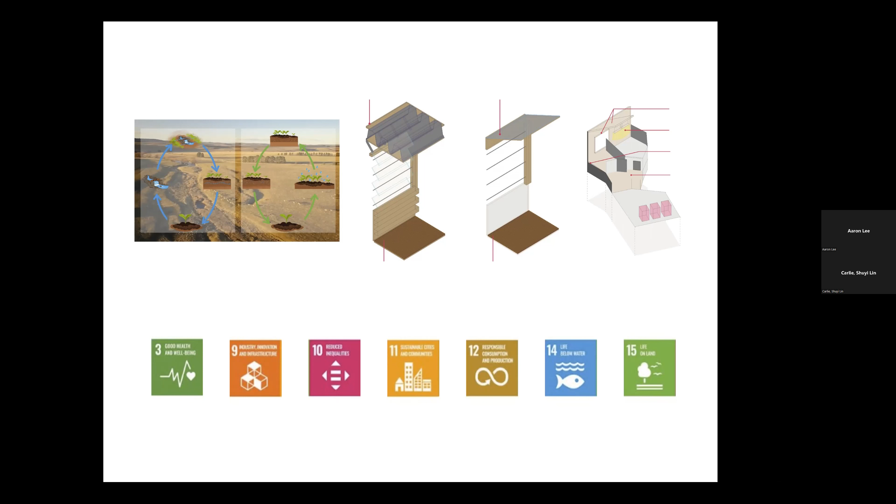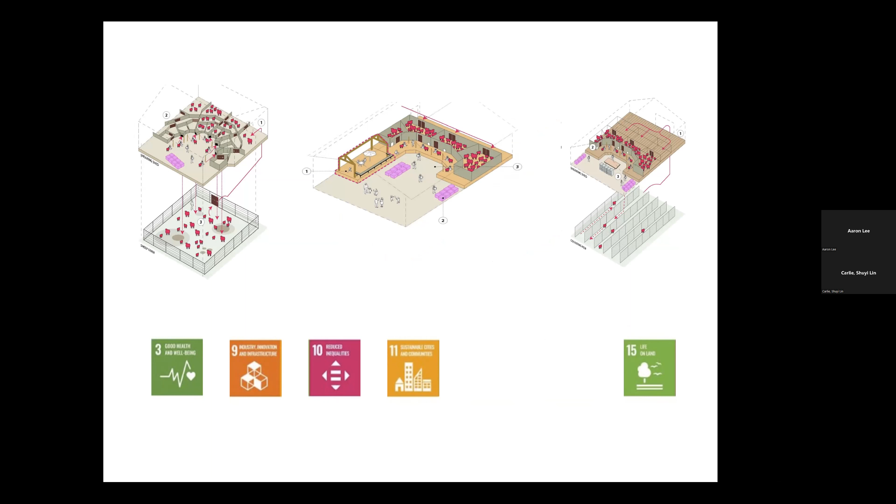We have summarized an overall failure on sustainable goals, such as a human-centric mindset and a neglect of biodiversity development. However, some successful experiments can also be observed, such as duality uses between human and sheep during different time periods, improvement to employment discrimination, and design elements from the sheep's perspective.

As a stepping stone, this typology study on shearing shed has taught us the development of physical embodiment that represents a multi-species understanding, underlining the importance of multi-species cohabitation under the ever-growing contemporary needs.

Moving on from our typology studies, our design proposal looks into a deeper understanding of multi-species cohabitation and how it can lead to a symbiotic relationship between humans and non-humans.

When we first looked at Cooks River, it was pretty interesting to observe how the water body is presented as a dichotomy between human and non-humans.

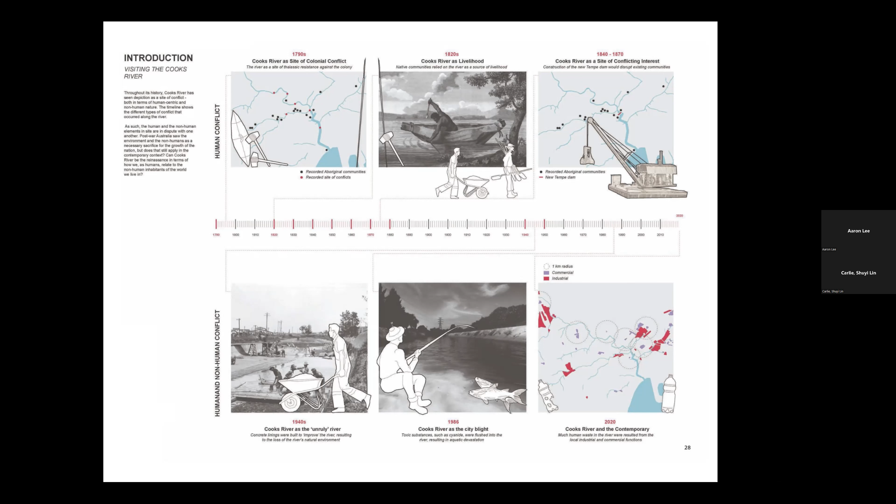We observed the different types of conflict that happened throughout its long history, from the human-centric conflict regarding colonization and later developments of rivers surrounding the native Aboriginal communities and the European whites, and to environmental awareness towards the river after post-war Australia. While the non-human ecosystem was considered a necessary sacrifice for the growth of the nation in the past, the question is whether that still applies in contemporary context.

Much of the environmental concerns around Cook's River arise from human greed and actions, creating an antagonistic ecosystem between the human community and the native non-human inhabitants. Thus, our project aims to explore this interaction between human and non-humans and the mutual benefits that can arise from it.

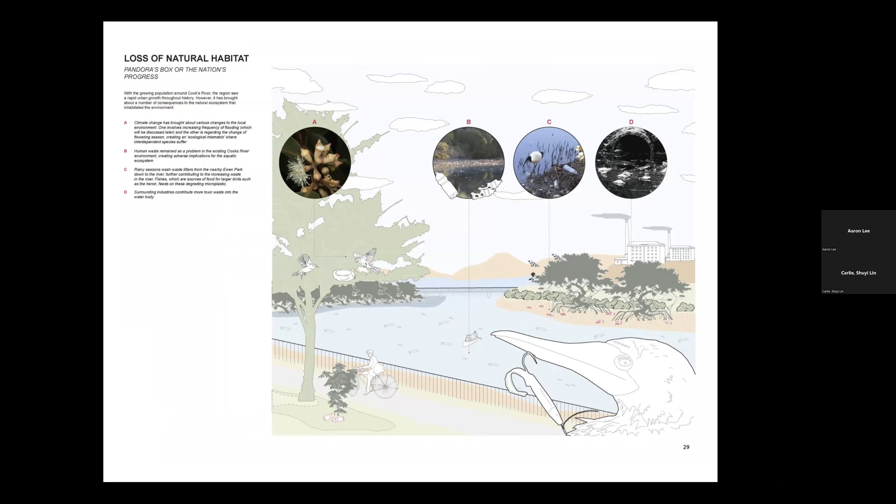As an opportunity for native pollinators and animals to take shelter, feed, and contribute to local biodiversity, the Australian backyard garden is shrinking in size along with the city growth.

Backyard gardens have the ability to not only provide friendlier spaces for non-human species to occupy, but also a chance for immersive education through interacting with nature. That is why it was once called the Australian dream.

One of the main changes we found from the typology development is the denser the city, the smaller the backyard garden. The lack of environmental role of the backyard garden has not only led to an inefficient backyard storage space, but also a reduction in opportunities for co-living, which can be considered a loss of the Australian dream.

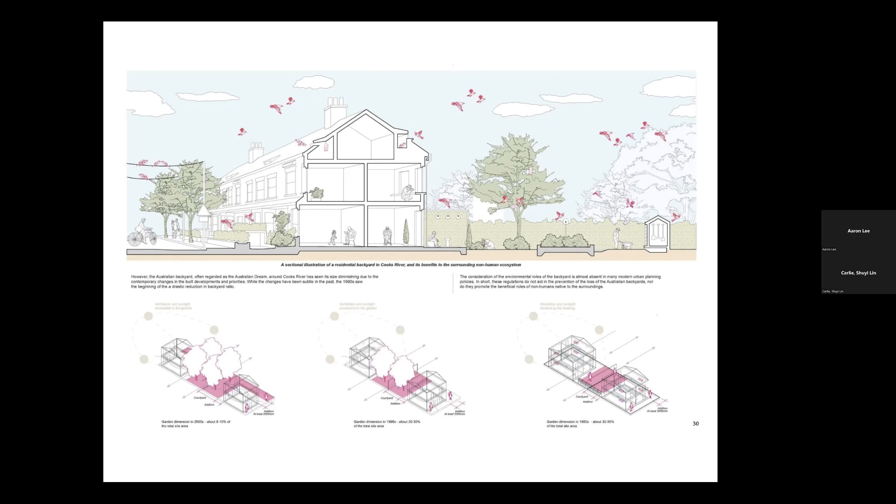From the comparison between the existing flooding condition and an estimation of the flooding condition in 2070 after sea level changes, the data indicates that the current site location can be submerged during the high tide period.

Water level oscillation in 2070 will be 1.4 meter to 3 meter above sea level during low tide and high tide, which means that the site will be constantly submerged even during the mid-tide period.

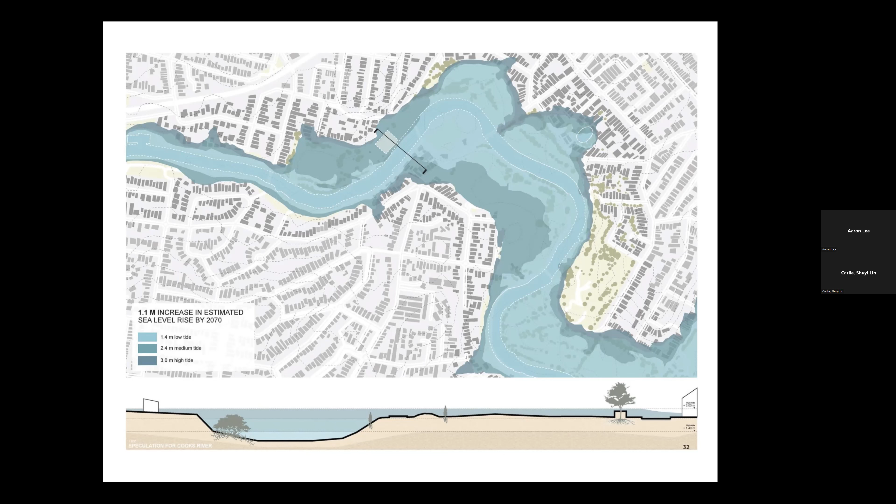After finding the potential threats on the site, we looked into the procedures and additional improvements done by the local community and local organizations. Many related events are held by the local government to improve the current condition of shrinking green spaces on land, like providing free gardening plant packs and services to collect green waste in each residential area. Other than that, there are also activities like litter picking on kayaks, bird watching, or bushwalking.

With the help of the two species we will focus on, which are the honey eaters and the mullets, a closed circle energy loop is created where a symbiotic relationship between the flora and fauna exists.

So what's so important about the honey eater and the mullet? Firstly, as one of the primary pollinators in Cook's River, the honey eaters play an important role in transferring pollens to surrounding plants of both land and water ecosystems to grow, which proved to be crucial as a form of shelter and food source for other local wildlife.

The honey eaters also help to remove water-dispersed weeds, which are antagonistic to the growth of mangroves and larger birds feeding on the river body. Similarly, the mullets help to digest leaf litter that mangroves shed, converting them into dissolved organic matter whose nutrients are crucial for the growth of these water-tolerant trees.

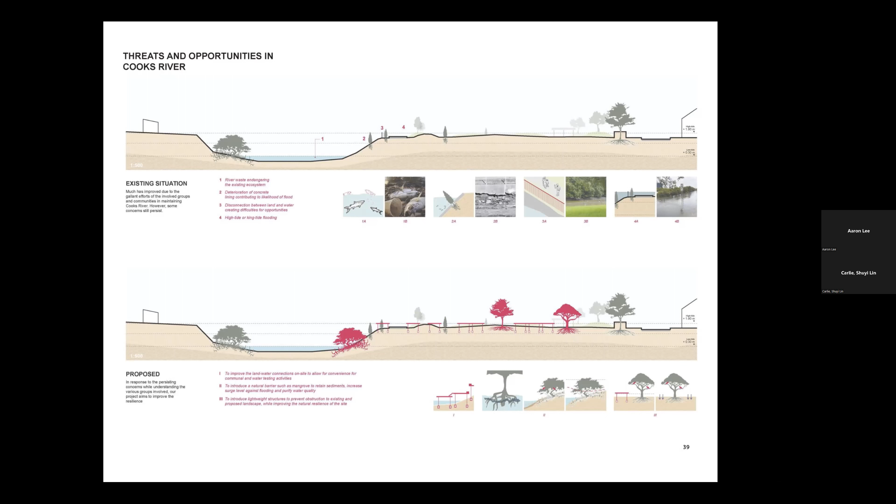In response, our design proposes several opportunities. These include improving the land-water connection to allow convenience for communal waste collecting and water testing activities, replacing concrete lining with a natural barrier that is more resilient and beneficial to the surrounding ecosystem, and building lightly so as to prevent obstruction to existing and proposed landscape while improving overall natural resilience of the site.

We begin our early research looking at the existing structures that used to or still inhabit Cooks River. We looked at how traditional Aboriginal clans utilize natural materials to build lightweight huts that could be easily repaired or adapted based on population size and programmatic functions, which in the end could be salvaged as shelter materials for native wildlife beyond its end of life.

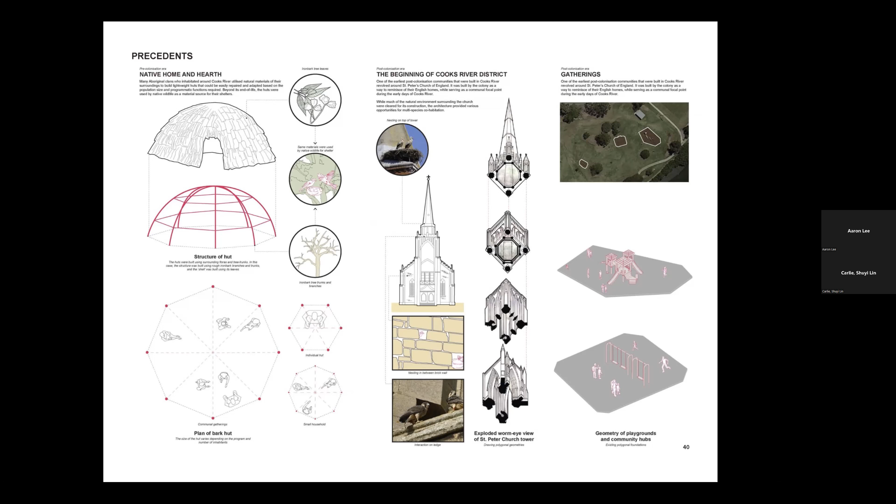We also looked at polygonal St. Peter's Church, which in spite of how much natural environment was cleared for the church construction, provides various opportunities for multi-species cohabitation. Lastly, we looked at the geometrical playground situated around Cooks River, and how it could be used by humans and non-humans alike as a form of recreation and shelter from both the weather and natural predators.

Based on our early studies of the sharing shed, we derived these six main concepts for our design. The first is to consider the proposal as a common between non-humans and humans. Spaces are designed to consider the duality between the two inhabitants while creating opportunities for symbiotic relationship.

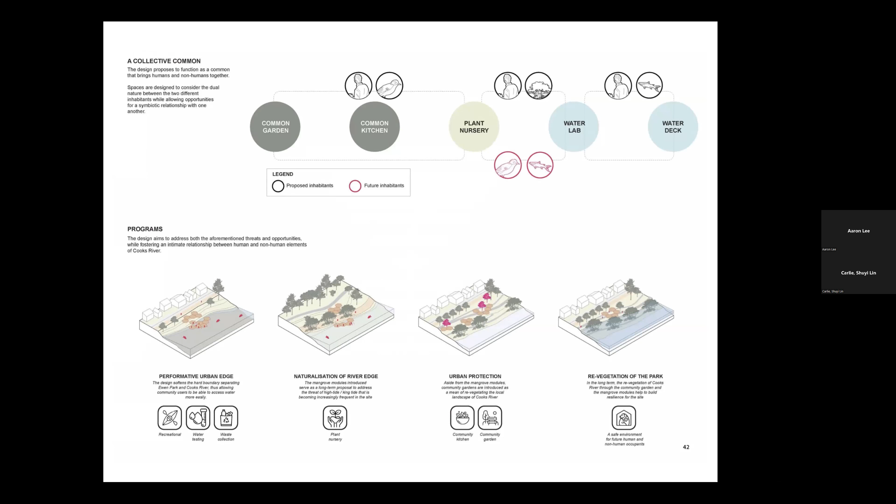The second aims to address the aforementioned threats and opportunities identified on the site and proposes programmatic functions that help to mediate the disconnected land-water relationship responsible for many of these threats. The urban edge between land and water is seen as an opportunity for social interaction and revegetative activities.

Thirdly, the design considers the various community efforts in revegetation of Cooks River and the aforementioned diminishing backyard spaces of its surrounding residentials, which manifest as adaptable modules that can be varied depending on the type of landscape planted.

The proposal further looks into adaptability to flooding, how programs and structures are able to accommodate a secondary function at different water levels for both human and non-human occupants.

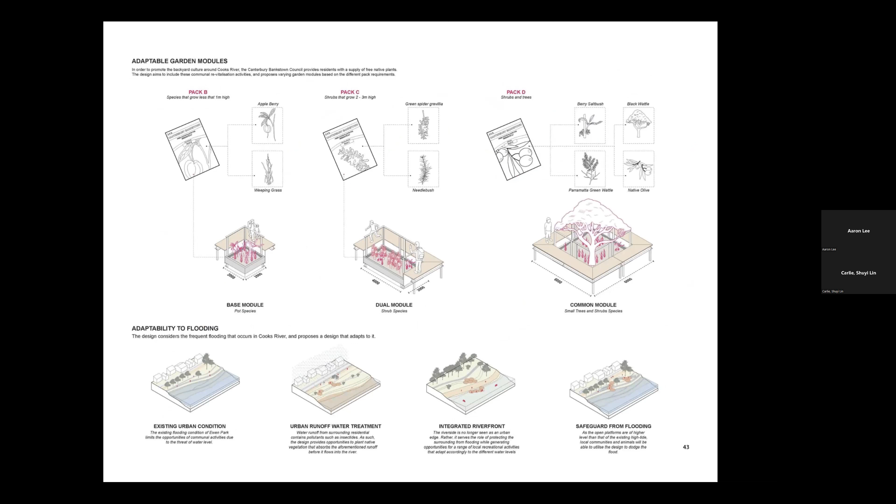Last but not least, the design is depicted to change over time. Programs and modules can be added and subtracted from this overall design to match the changing demands and necessities of the community. Over time, the design is envisioned to be adopted to other parts of the river to address different concerns they possess.

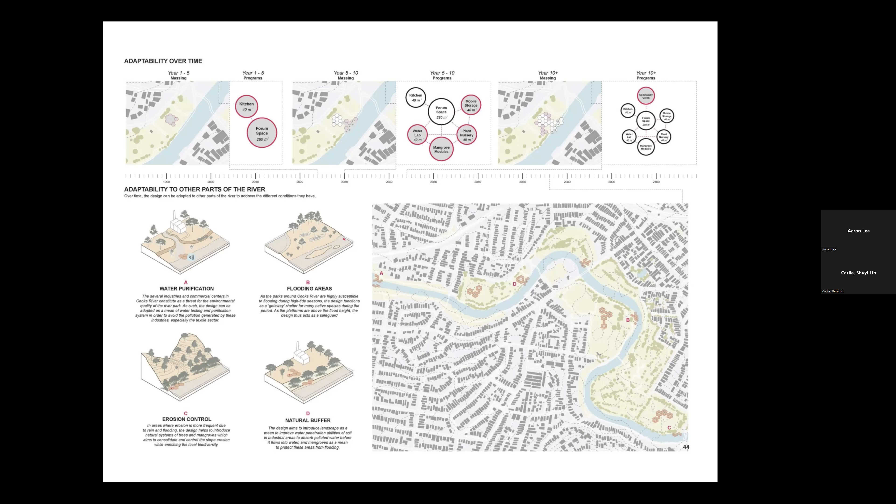Such as water quality testing, frequent floodplains, and soil erosion, while aiming to build resilience through the naturalization of river edges from the growing of mangroves. The axonometry shows how the final design sits on site.

Looking at the plan of the modules, we have arranged a relatively more natural flow from the community to the module and to the river.

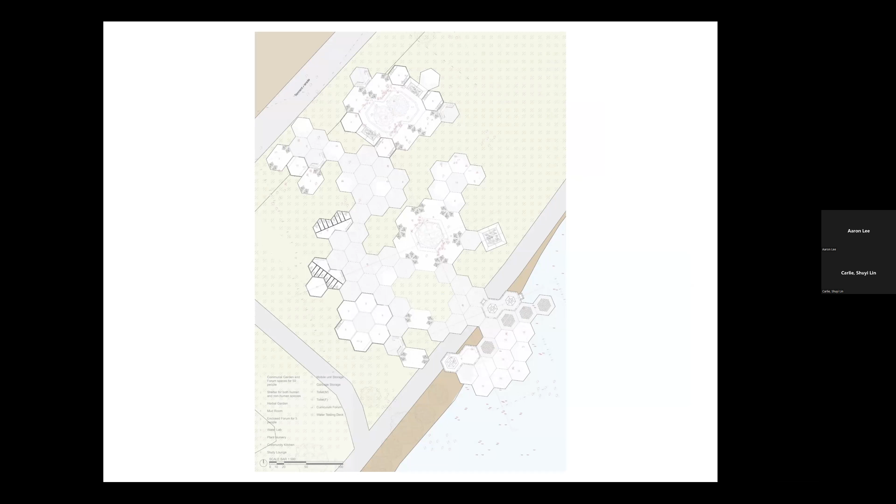For the section of the communal garden, to create an environment for native species to survive on site and be promoted by the local community, shrubs, pot plants, and small trees will occupy three different spaces to create a variable environment for non-human species. Exposed spaces could accommodate not only more than 50 people together, but also provide a backyard garden to the local non-human species.

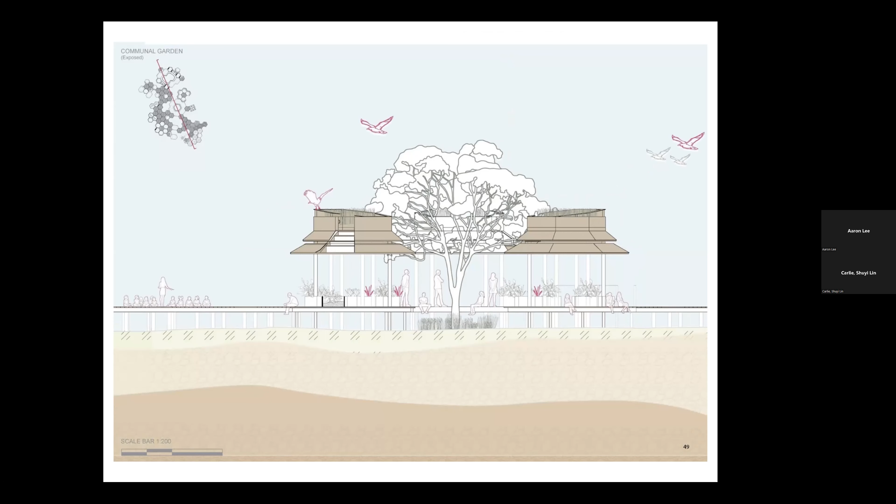The plant selection of the communal garden is a combination of small trees and shrubs. The dimension of the garden also refers to the changing size of the backyard garden in the surrounding neighborhood, to provide a more accurate and relatable precedent on the backyard garden for local residents.

For the water modules, plant nursery and water lab are both placed nearby the river with a platform going down to the river, allowing closer sight and interaction with non-human species.

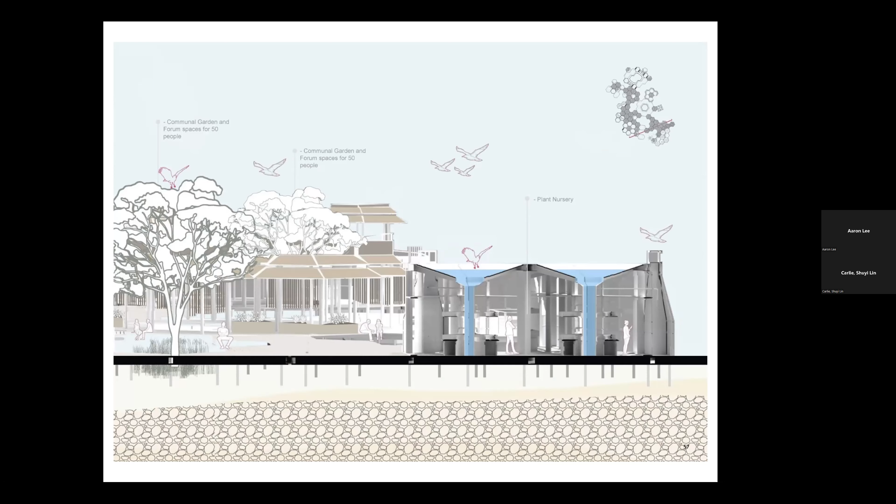The enclosed spaces can be used for private office uses, and can also accommodate services including toilets and storages.

The aforementioned structures illustrated in the section show how structures are adapted differently based on their different conditions and situations. For most of the park modules, which are mainly built above the flooding level, timber is used to further enhance the natural atmosphere to the whole design.

However, modules which are exposed to the river water are built using concrete to prevent potential corrosion. In addition, these modules can be altered based on the programmatic requirements, thus allowing community users with the flexibility to add or remove walls depending on their demands and needs.

The louvered walls are introduced to minimize bird collisions that happen quite frequently around Cooks River, while allowing for natural lighting and ventilation to occur within spaces. A second story can be added to provide better vantage points for sightseeing or bird watching.

Lastly, as evident from the open steel rafters and the stilted steel structure, the modules adopt a skeletal structure to promote non-human inhabitation during times when the spaces are not occupied by humans.

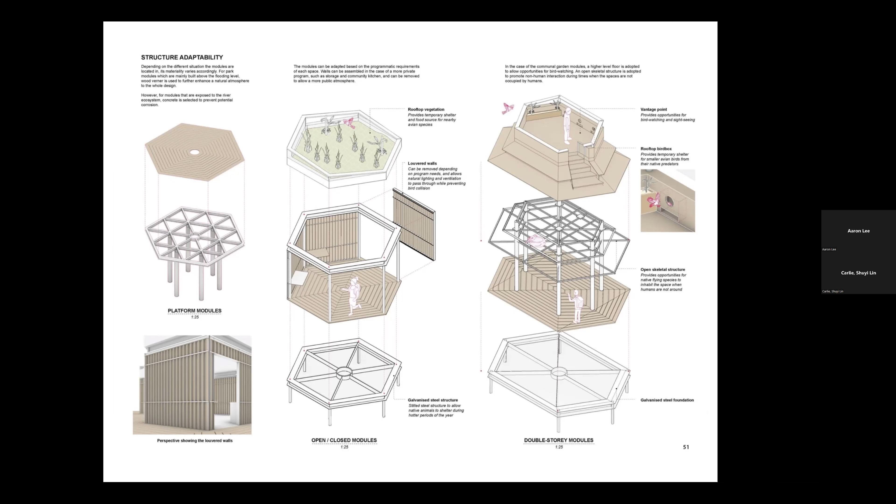The community garden serves as a critique to the diminishing backyard spaces of the surrounding Cooks River residential and provides the community members with the option to be involved in the revegetation of the site. This will in turn provide a more attractive environment for major pollinators such as the honeyeater to nest.

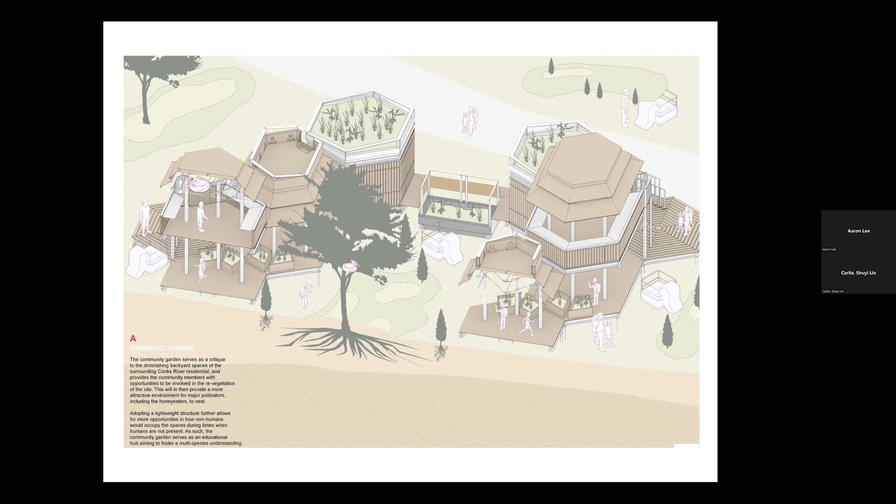As discussed, a lightweight structure is adopted to provide non-human inhabitation opportunities during times when humans are not present. As such, the community garden serves as an educational hub aiming to foster multi-species understanding.

The community kitchen provides foraging opportunities for both human and non-human inhabitants. The function complements existing policies to promote revegetation of native plants while allowing both community users and groups to be directly involved in their own food production.

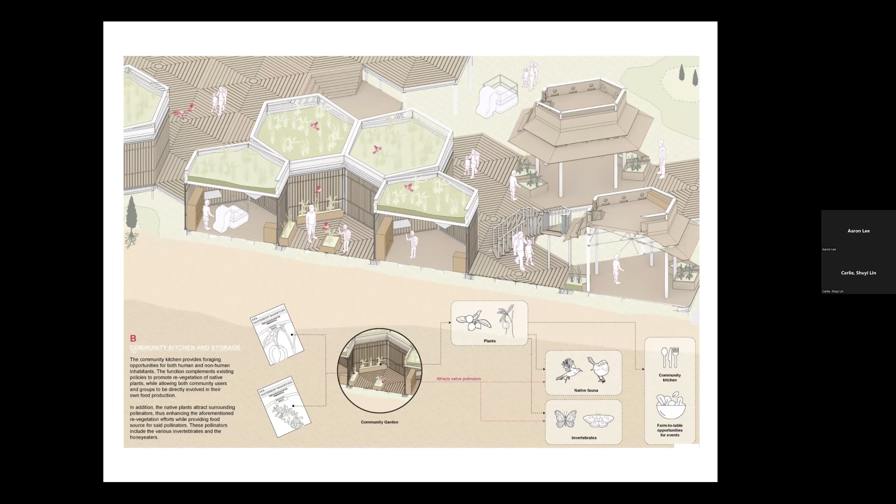Furthermore, the native plants attract surrounding pollinators, thus enhancing the aforementioned revegetation efforts, while providing food source for said pollinators, which include various invertebrates and the honeyeaters.

The consideration between human and non-humans is also adopted to other modules. Here in the plant nursery module, rainwater is seen and considered to be mutually benefiting both inhabitants.

In addition to its functional purpose, the rainwater harvesting roof doubles as a bird bath or drinking fountain for the native honeyeaters to rest. Furthermore, collected rainwater can be used for either plant nursery purposes or the compost bin, in which leaf litter collected from the nursery or its surrounding is decomposed into usable fertilizers.

Once the mangrove seedlings have grown large enough, they are moved to the outdoor modules, which can be further adapted to suit the growth of the mangroves.

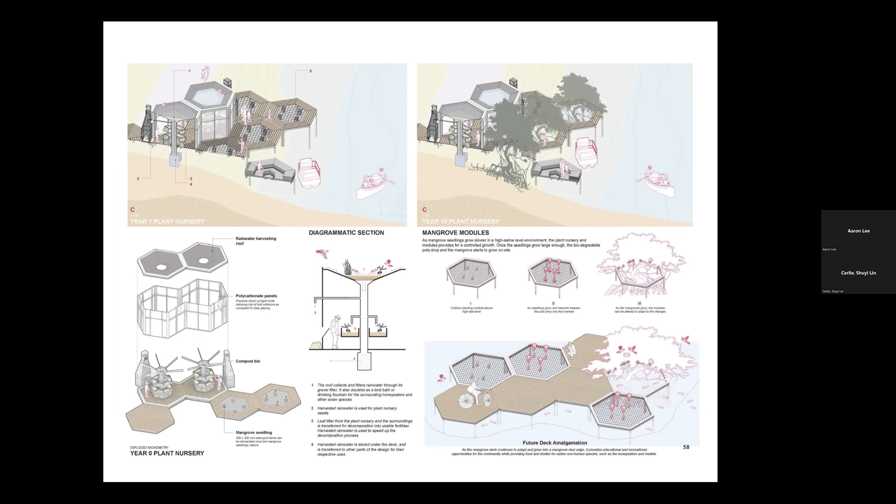Lastly, in addition to the human and non-human relationship, the water lab and deck considers the different tide levels into its design. During low tide seasons, the water lab functions as an educational aquaponics system for researchers and community members, while providing juvenile mullets with a safer environment to grow.

The outdoor deck is exposed for public use and functions as both a communal gathering space and a more convenient means for volunteers to collect water for quality testing. Here, the deck also provides the community with opportunities to plant water-resistant flora such as the native sea rush.

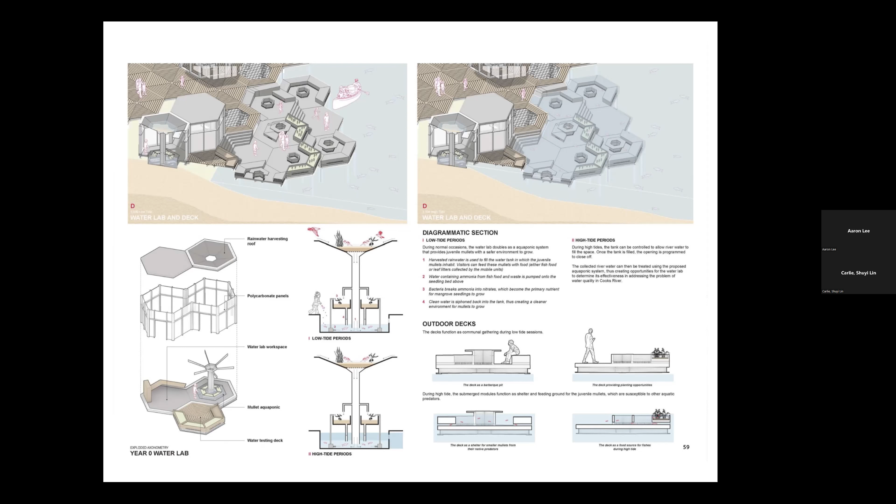As tide begins to rise, the aquaponics system allows in river water, which creates opportunities for the water lab to determine the system's effectiveness in addressing the water quality problem in Cooks River. At the same time, the submerged seedlings and aqua landscape act as shelters and food source for young juvenile mullets.

Along with it, we propose these smaller mobile units that can be used to collect leaf litter and inorganic waste around the site. These leaf litters could then be either used by human inhabitants to create fertilizers, or for the non-humans on site, in the case of food source for the mullets or a collection of nest building material for existing honeyeaters and other avian species.

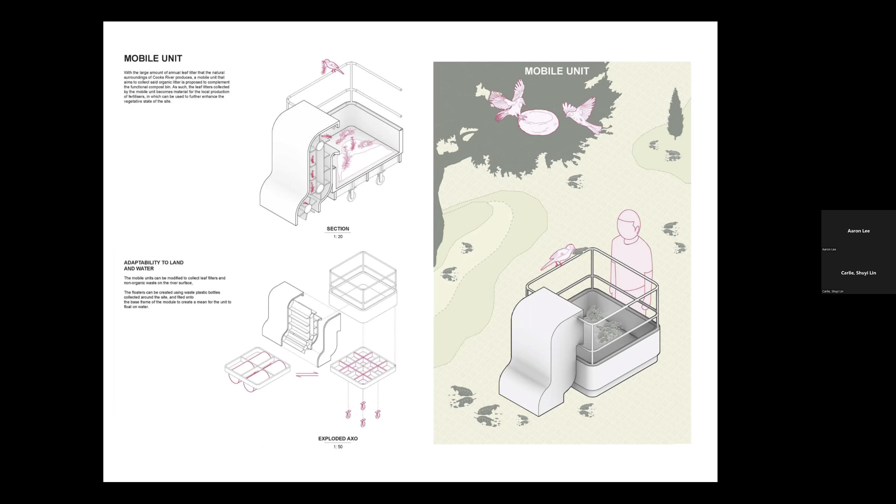The section shows a general understanding of how the unit functions, which can further be modified to suit different conditions and environments. To summarize, the proposal delves into the multi-species conditions of Cooks River, thus understanding the existing threats and opportunities that can arise.

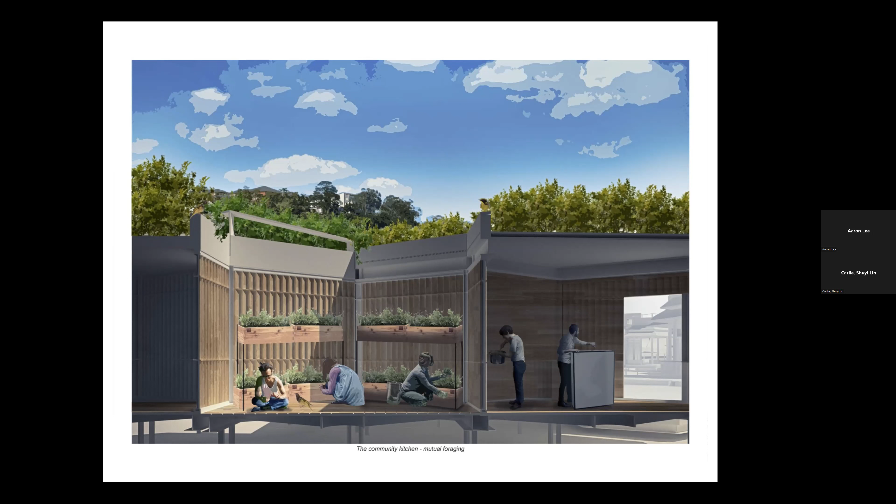The proposal aims to foster a democratic and symbiotic gathering space for community members, various volunteer groups, and the non-human inhabitants of Cooks River, thus adding educational, social, and functional values that can help to foster this mutual multi-species understanding.

The design pays respect to the natural environment of Cook's River by adopting an open light structural system, which opens up more opportunities in which native wildlife can inhabit the space when not being used by humans.

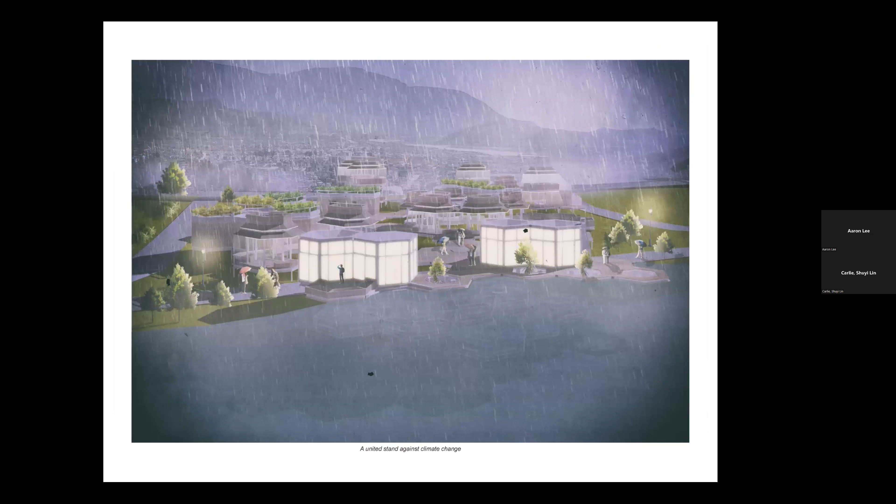As a final conclusion, the architecture serves as our contemporary desire to understand and cohabit alongside many non-residents of Cook's River who fell victim to our capitalist desires for progress, and a united stand against the ever unpredictable and imminent threats of climate change.